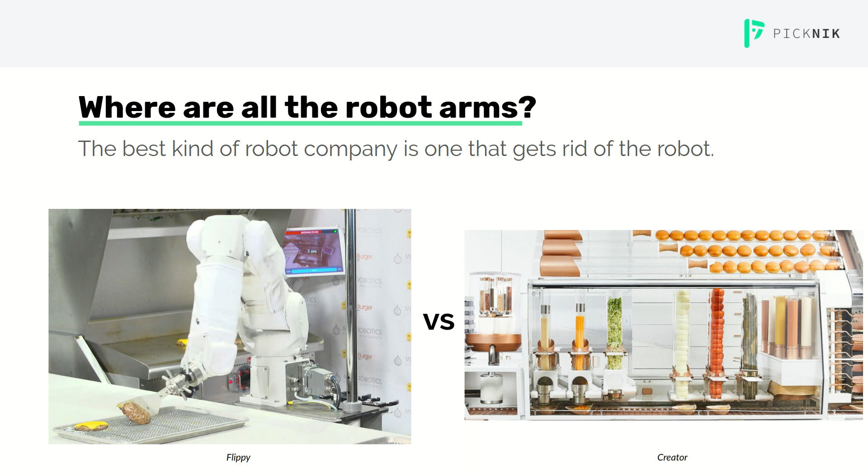Similarly, in San Francisco Airport, you may have seen Cafe X. They have a robot barista to make you coffee, but we've had coffee vending machines for decades. While the quality may not be as high, I bet we could fix that if we put our minds to it.

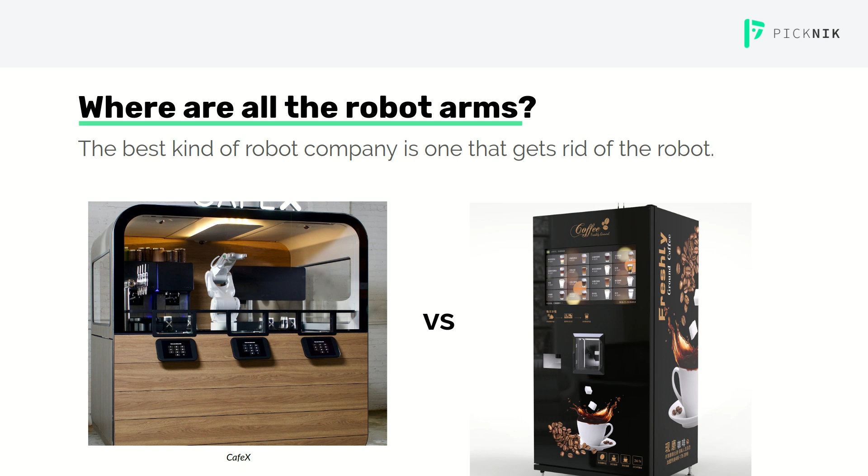So perhaps robot arms aren't always needed, and that's why we haven't seen them all the time in our lives. But I would still expect that in our normal day-to-day lives, we would come across, in this day and age, in 2020, robot arms more often. Unless you work in a factory or a car manufacturing plant, you may never see robot arms on a day-to-day basis.

But the dream's always been there, and it still is. I think we're on the threshold of something big, seeing robot arms really explode in investment and commercial activity beyond manufacturing. The dream is this multi-purpose robot, and that's when I think robot arms are appropriate: when you have a multitude of tasks that the robot can adapt to and do alongside humans, not having to change the environment much, not having to change your kitchen, your home, your office.

In this picture, we see the famous PR2 robot, built by Willow Garage. It was the original robot built for ROS, which I'll talk about later, the robotic operating system. This is essentially the promise of Rosie the robot from the Jetsons, in 1962 when that cartoon first aired. We've been dreaming of this for a long time.

What you see in these pictures of dishes, cooking and laundry, this isn't commercially available yet, or it barely is. This is mostly pictures from research groups and labs. So let's not get too excited, but I think we're on the cusp of that.

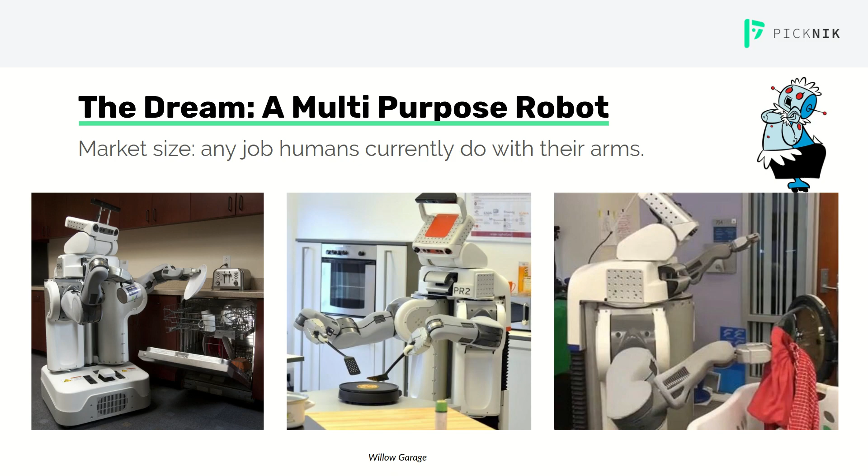Before I talk about the future, just a quick background of where we've been. In 1961, we saw the first industrial arms being used in manufacturing plants. That's a full 60 years ago now, and teach pendants were the dominant way of programming them. There's been incremental progress ever since, such as PC-based control.

The biggest thing in robotic arms in recent years, all the buzz, is cobots. Marketers love the term cobots. What that means, in case you're not an expert in this area, is the robot's safe enough to work alongside humans. You could have a human doing a task and the robot assisting, or the human take over, or the robot take over, and the forces, torques and other aspects of the robot behavior are such that it's safe for an average worker to work alongside.

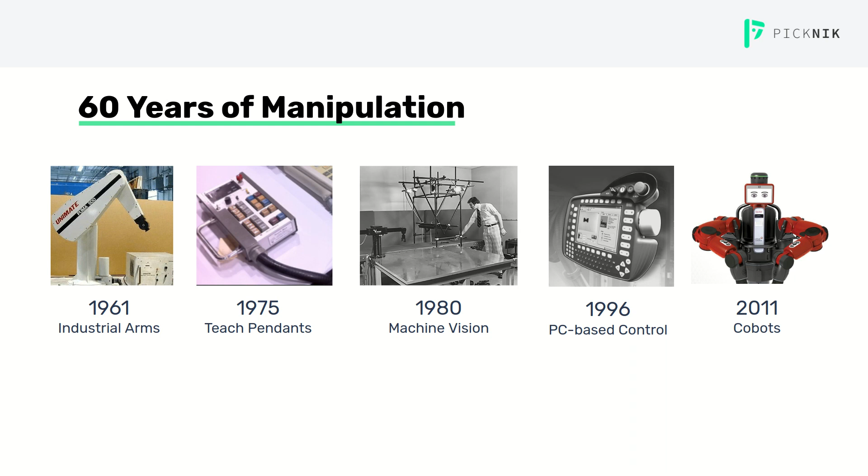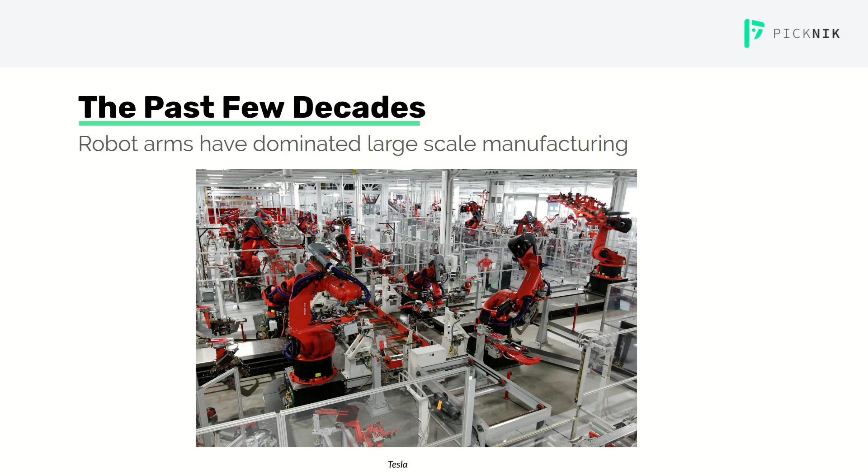But there's still been a lot promised with cobots that hasn't fully come to fruition. The other thing about cobots is that they don't require a safety cage and e-stop, the same kind of e-stop circuits and such. So where robot arms have really dominated is large-scale manufacturing. This is a Tesla plant, but really every car manufacturer, that's still the number one place where robot arms are sold, and all sorts of other manufacturing.

More recently, what's really exciting right now in terms of robotic investment for robotic arms: self-driving cars were huge a few years ago, and other sorts of AI, but right now the warehouse logistics space is blowing up. I think a lot of this is because of Amazon and how they're dominating this industry of next day shipping, 2-day shipping, and other companies are trying to catch up, such as Berkshire Grey, Right Hand Robotics, Kindred.

They're all doing types of mixed package, mixed parcel sorting, where you have to sort between different products and fulfill them for different orders. It's a lot harder problem than a conveyor belt of the same exact product; rather, you have this large mixture, and it takes a lot more AI, perception and sensing to achieve these.

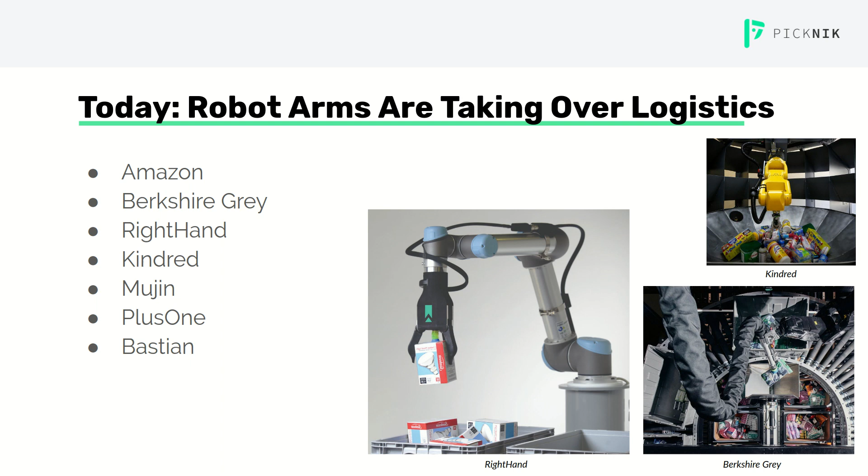What we're on the cusp of, I said tomorrow in this slide, maybe it's tonight. Mobile manipulation is the next big thing, combining autonomous vehicles with robot arms. A number of companies are going after this right now.

IAM is one of the more traditional ones, the robot arm tacked to a base. Invia doesn't really have a robot arm, so it barely belongs in this talk, but I think it's pretty clever how they use a combination of suction, a mechanical system, and a scissor lift to move boxes off shelves.

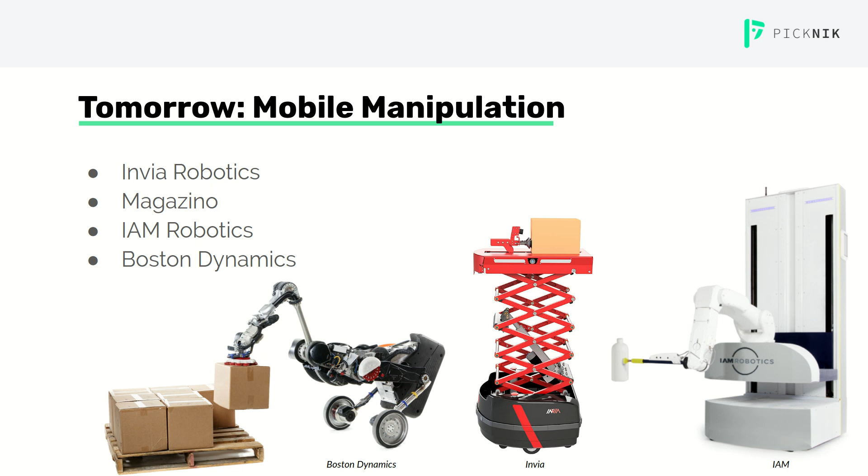And finally, the gorilla in the room, of course, is Boston Dynamics, popularized by all their great demo videos. Here, they've now turned their eye towards a commercial application of warehouse logistics. Other companies are also coming to the front, like Bastian. And so the market size for all of this is huge.

Basically, the tasks that humans do with the two appendages on their body—we do so much with our hands and our arms. As robot arms become more capable, they will be able to do essentially all of those things. So because this is robo business, I wanted to provide some concrete numbers: this global robotic arm market is forecasted to basically double by 2024, to 40 billion.

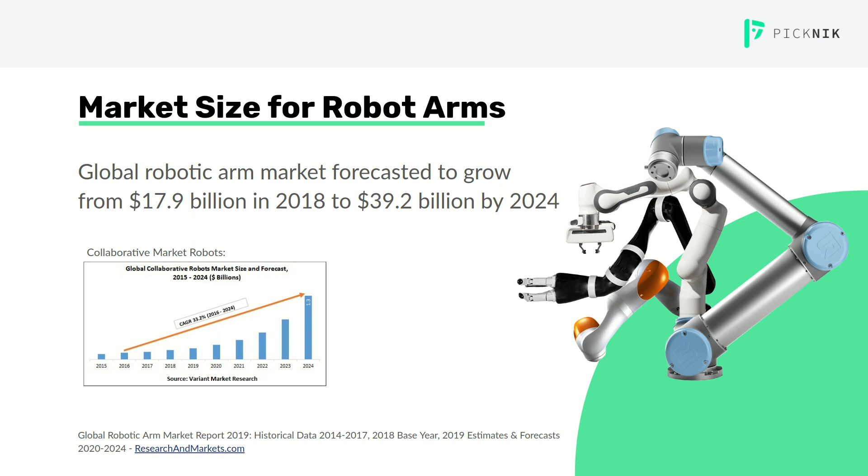And even the collaborative robotic space is exploding, as shown in this graph. So there's just a lot of money and attention being paid right now to this. But the question is, how do we still get these robot arms out of the factory? There's some limited success right now, but it still really hasn't taken off.

Particularly, where is our Rosie the robot? So I personally—my career has been about robotics and arms—and my dream has always been to have a robot that can do things like laundry and setting the table.

And so how can we get robots beyond these highly structured factory environments, even warehouse environments, into other commercial spaces, medical spaces, and consumer spaces like the home?

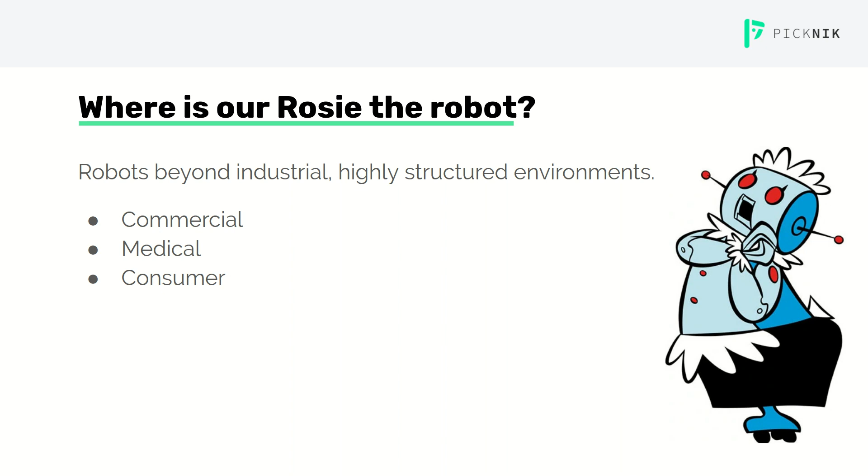So there's a few things, and what I call them here are these next-gen robot manipulation capabilities, these advanced capabilities. Even Boston Dynamics has done some pretty advanced stuff, but when you look beyond the demo videos, there's still a lot of shortcuts they're taking and a lot of blind spots in their capabilities. So I want to present to you in this talk these five things that are preventing us: costs, the software capabilities themselves, things around safety, mobility, and standards.

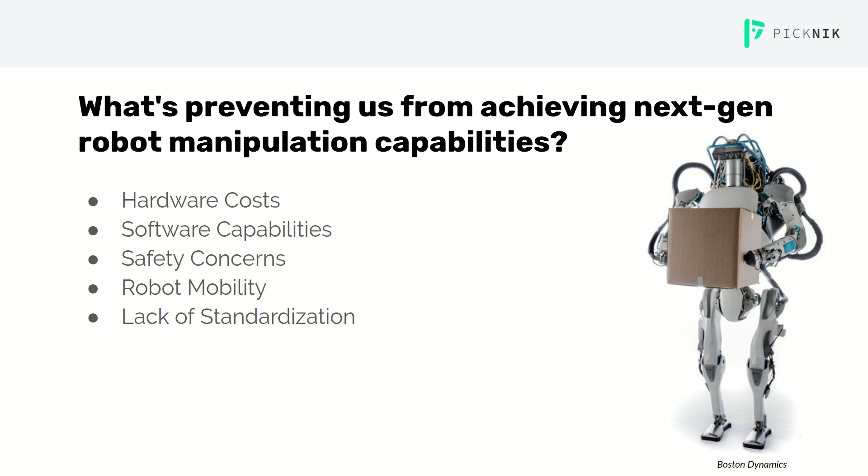So in terms of hardware costs, the harmonic drive pictured here is the bread and butter of most robotic arms today, or at least for collaborative robot arms. There are many other mechanical systems for controlling robot arms, hydraulics and whatnot, but let's just start with this example. This piece of equipment has a lot of tight tolerances that are expensive to manufacture. And so in order to get the precision and accuracy that manufacturing applications demand, this is a requirement.

But if we could make smarter software that can compensate for things like mechanical noise and backlash in robot arms, then we could presumably make cheaper hardware. And so things that would accomplish that are closed loop control, where you take sensors and get quicker feedback, and other things like visual servoing.

So an example of this: if you're listening right now and you have something in front of you that's a fixed object, reach your hand out full and straight. Don't touch anything, but put your finger very close to an object—maybe it's your laptop, maybe it's the dashboard of a car you're driving right now. Well, if you're driving, be careful. But notice how if you put your finger very close to an object and focus on it, your finger is kind of shaking and can't exactly hold its position.

Now, an industrial robot arm—these traditional beefy arms—can be super precise, where you don't really notice any shake or jitter. But our human arms, we don't have very precise manipulators. Our arms are noisy, and that's okay—we're extremely versatile. Humans are very dexterous and can do a lot of great stuff. So presumably our robots should be able to do the same thing for these everyday robots in non-manufacturing spaces. So we know it's possible, we just need smarter software.

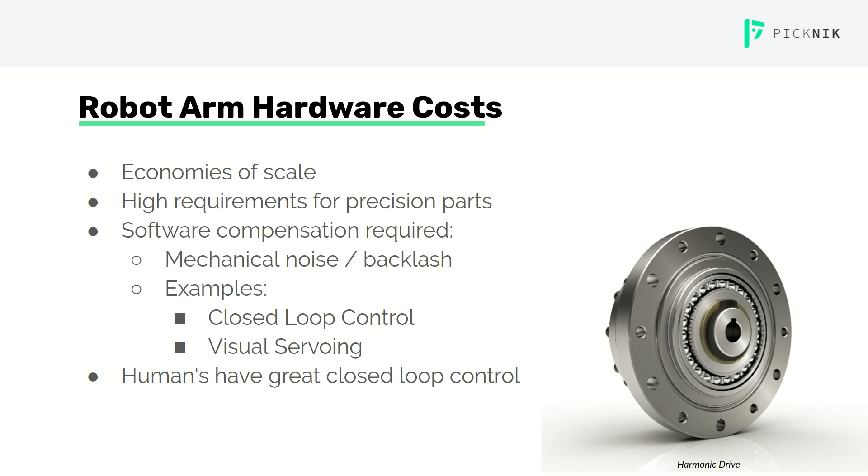There aren't a lot of killer apps right now where robots have really blown up, or any particular robotic company that's really blown up outside of these factories and warehouses. When it does, though, we'll see prices plummet. So if we could attach a robot arm to every cell phone that's manufactured today, we would see prices drop.

That's totally impractical and makes no sense, but you get the example. So the next point of what's holding us back are these software capabilities. I just talked about how we need closed loop control, but there's other things that are difficult for robots to do outside of structured environments.

So things like partial occlusions. In this picture here, you see it's a very cluttered environment, and maybe you want to grab the salt shaker, but it's covered by another cup or pot. The robot has to reason about how to grab something behind something else, and that takes a lot of extra computation to plan this non-linear motion.

On the perception side, when something's partially covered, it's a lot harder to recognize than if you have the full visual of the object. If you can only see the top part of a salt shaker, it might be more confusing for a computer system to recognize.

And then finally, these unpredictable situations. It just takes a lot more state machines and decision matrices to predict these different situations and how to compensate for them. A lot more error states to account for.

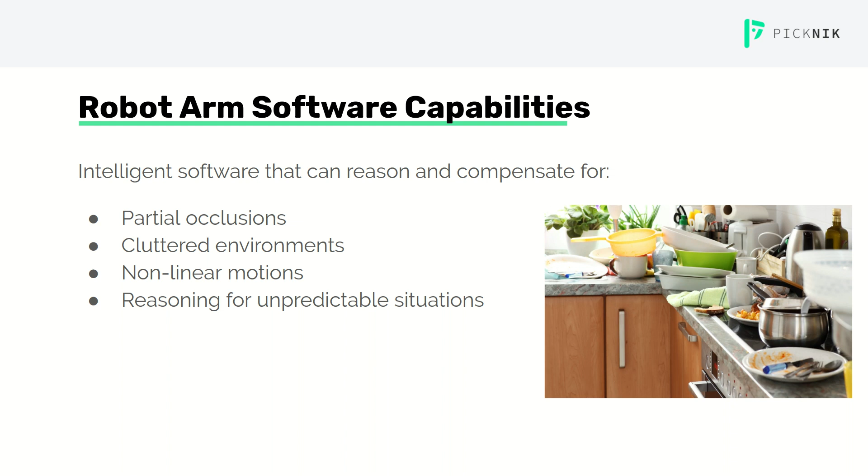In self-driving cars, we've had the technology to do self-driving for a long time, but getting all those unpredictable situations of bikers and pedestrians jumping out in front of cars all the time, that's taken a lot of engineering and ingenuity to accomplish, and we're still seeing that worked on today. We'll see the same thing as robot arms are released into more common spaces.

And that brings me on to safety. Speaking of jumping out in front of cars, don't do that.

These consumer applications, like these hypothetical robots in your home, face a whole new slew of difficulties that we haven't seen in factories. You have non-professionals who aren't trained, who maybe aren't as alert because they feel safer in their normal offices or environments. So, for example, we haven't dealt with, as researchers or developers of robotics applications, children playing on a robot.

But a robot arm has all sorts of pinch points that could potentially hurt a child, and that would be terrible and a giant liability issue. So we have to worry about that, or even other unpredictable things like curious pets. I've never seen a video where a cat jumped on a robot and gave it a hard time reasoning about what to do, but it's bound to happen one day.

And then finally, there are trade-offs. So cobots, one of the things they've done to make them human safe is to simply slow down the velocity, the momentum these pieces of mass have, so they can't harm a human. But if you have a robot that's too slow for safety reasons, it really doesn't become very useful.

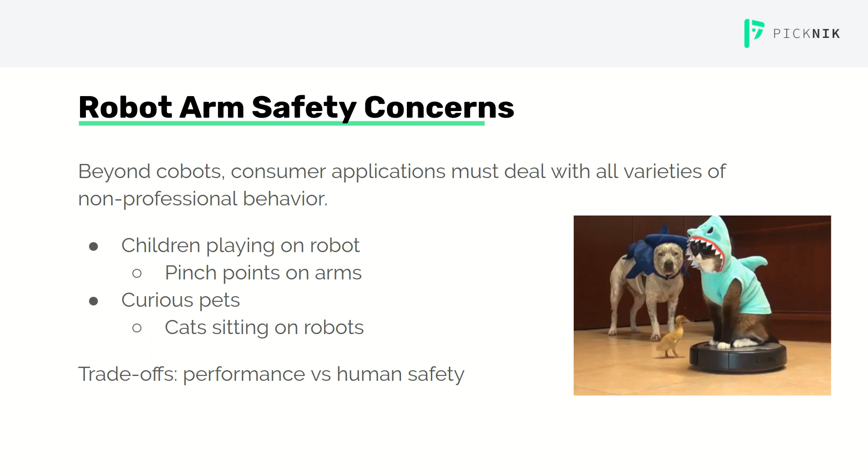If you ask your robot to set the table, but it takes 10 minutes, your food's going to be cold and you won't be happy with this robot. You won't buy it. So it's a trade-off, and we need more clever ways of reasoning about the environment for safety concerns.

One thing robot arms are typically limited by is that they're bolted to the floor or to a table, so their workspace is only what their 6 or 7 degrees of freedom can reach. We have to worry about how to give a robot a larger workspace so we can do more tasks, because if you're bolted to a table, there's only so much you can reach, and you can't go across the room to do something else useful.

So of course we need mobile manipulators that have wheels or legs. But then a whole other set of problems occurs. First, costs go up because you have a lot more hardware to deal with. The complexity goes up because calibrating your robot arm's location in space is made more complex since it moves.

Another thing is that in a lot of homes and even commercial places, you'll see tough thresholds for wheels to drive over, or steps, or even worse, staircases. A lot of commercial buildings do have elevators, but not all. So if you don't have an elevator, it makes things very difficult.

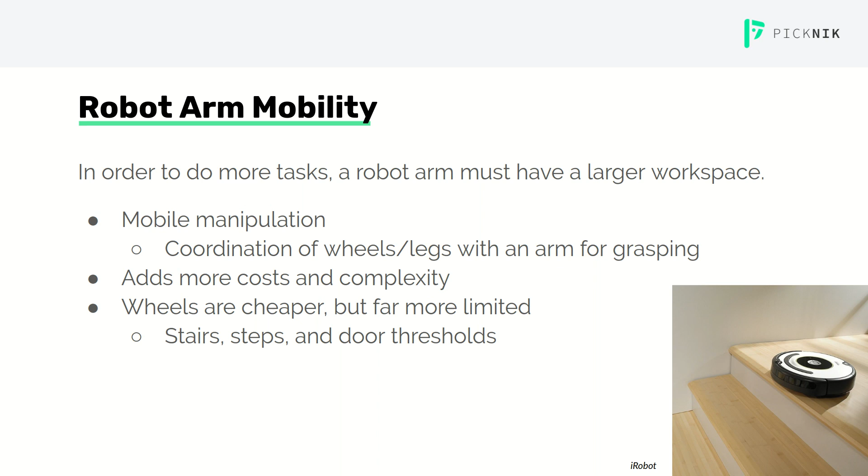The common workaround for this is legs, but legs are even more expensive in terms of hardware cost and in terms of the danger of losing balance and falling over—the same kind of problems we've seen with the Roomba and iRobot as pictured here.

Finally, the last point is standardization. This is really a big push of the rest of my talk: how do we standardize all these components that must be put together to make versatile Rosie-type robots to get these next generation manipulation capabilities.

Right now, every manufacturer of arms has their own custom interface, for lots of historical reasons. I did some research for this talk, and I was shocked about just how many scripting languages there are, for FANUC, ABB, KUKA, Kawasaki, the list goes on. Then on top of that you have standards like Python, C++, Lisp. So it's difficult, if not impossible, for one person to know how to use all these different types.

And what that creates is vendor lock-in. Once you build a system for one type of arm, it becomes hard to transfer that application to a different arm. And that reduces price competition.

Now I want to talk about why current solutions do not address this Rosie problem. There's two areas I want to focus on: one is off-the-shelf hardware, and the other is on the software side.

On the hardware side, most hardware is shipped with programming environments that are too restrictive for a lot more advanced applications. Now there's benefit to this because they're very focused, they're really good at doing a few things, and perhaps easy to do those few things, which makes it better for non-experts. But if you're an expert user developing your own robot product...

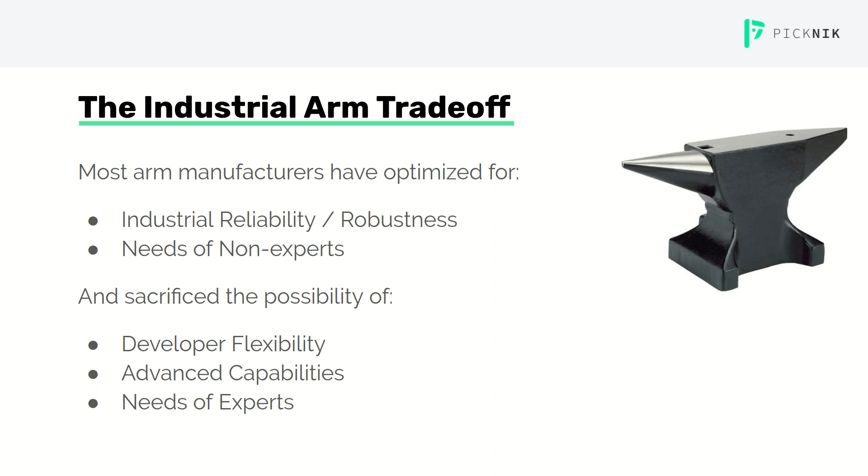I've heard this resonate from a lot of our clients at PickNik and a lot of researchers I've talked to, and other people I've shared these thoughts with. So in sum, I'd argue this is an innovation-hindering environment. There are a lot of great things going on in robotic arm manipulation, but there are some issues if you're trying to build non-industrial robotic arm applications.

So you have to balance three things, and it's a very tricky thing to balance. If you want to make a robot to make burritos, for example, you'll have to make custom software that solves fundamental, low-level algorithms for robots - like inverse kinematics - things out of textbooks that have been done a million times before. You'll also have to build custom software for all the reasons I just described.

You may come to the decision that you can make it cheaper and avoid all these API issues, so you have to set up your own supply chain and do all the robustness testing required in making hardware. Very big endeavor.

And all the while doing these two things, you have to also focus on what your actual end user needs and wants. So if you're making burritos, what's the temperature going to be? How do they want it delivered? What's the best flavor profile? These things don't even matter about the robot algorithms - you just want to take those and focus on the secret sauce of whatever company, Robot for X, that you're focusing on.

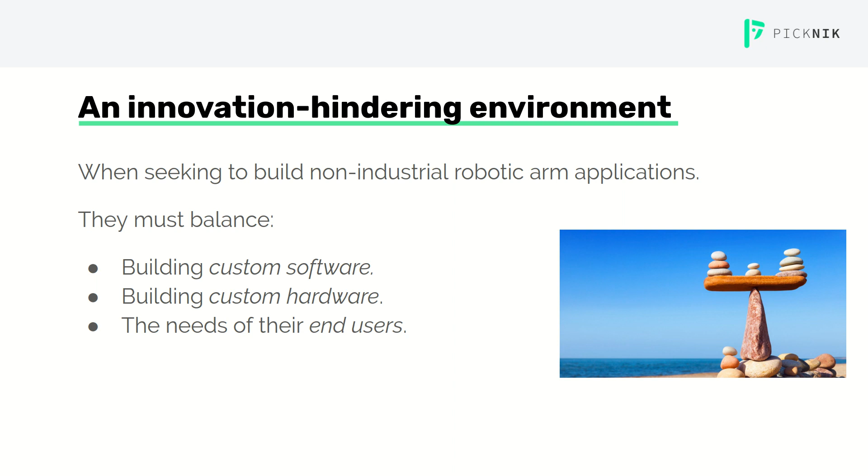So, the ARC - an alternative approach. I was going to get here eventually, but I think a lot of the solutions to the problems I've outlined are open source robotics. This is a much more collaborative environment that will cause more innovation so we can finally get to that Rosie the robot that we all dream of, or most of us dream of.

This innovation-limiting environment would be solved better if we had more open standards in robotics. Robotics is a young field, so it's understandable we haven't established a lot of great standards yet. But open source is a great way to make huge strides there, and we already have - open source has been around for quite a while now in robotics.

It would help with interoperability so you can avoid vendor lock-in, better collaboration between academics, researchers, commercial companies, R&D labs and corporations, and really just avoid reinventing the wheel. On the collaboration point, there are a lot of hard problems not solved yet in robotics - we can't just assume we can take what exists and close our eyes to innovation, but there are still fundamental problems preventing us from solving this Rosie problem.

So the logo down here, ROS, the Robotic Operating System - I'm sure almost all of you have heard of this, but maybe only a little bit, so I'm going to give some background. This was started in 2008 at Stanford and at Willow Garage and has really taken the robotics industry by storm. It's got a lot of momentum. Willow Garage's thesis about why ROS matters is that creating truly robust general purpose robot software is hard - so hard that no single individual, laboratory, institution, or even company can hope to do it on their own. So we have to work together to get this future of manipulation that we're dreaming of.

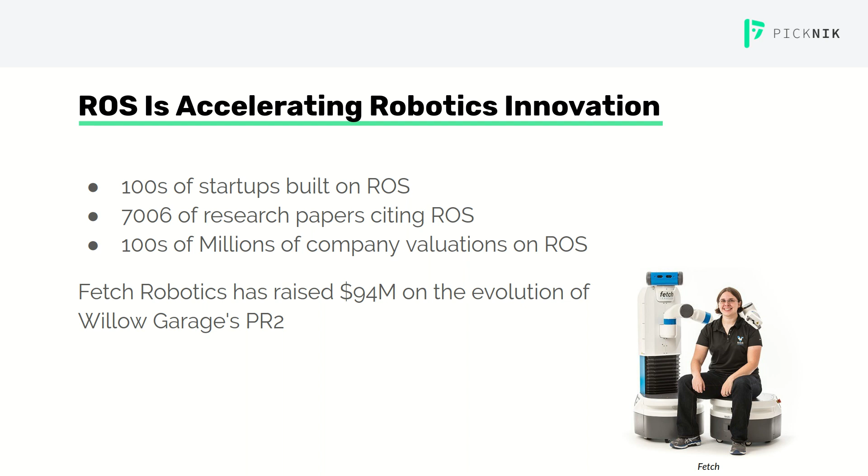I mentioned earlier just a little bit more about ROS. Hundreds of startups have used it. There's been 7,006 research papers cited to date on ROS, and hundreds of millions of dollars of company valuation, such as Fetch Robotics. The CEO, Melonee Wise, was one of the original creators of ROS before she started Fetch. This company has since raised $94 million based on that PR2 robot I showed you at the beginning of my presentation. They've basically evolved that to what you see in this picture.

To be fair, open source is maybe not always appropriate. If you have low customization requirements, if you're not building a robot product yourself, just automating a factory that makes paperclip widgets, maybe you don't need something as complex and flexible as ROS or open source robotics in general. If you don't care about owning any robotics IP and you'd rather just license it from another integrator or robotics company, maybe you don't bother with ROS, although I'd argue the companies you're licensing from are using ROS under the hood, most of them. And finally, if you don't have an expert development team, you don't want to pay those high San Francisco or PhD salaries, maybe ROS isn't for you—but there are developers all over the world using ROS that doesn't require those high salaries.

A common concern I hear when talking to our clients is intellectual property, and this myth that bringing in open source can somehow hurt your patents or your IP. As long as you're not doing copyleft—check with your lawyer, make sure you read the licenses, but ROS almost never has that—then you're pretty much in the clear. Really, your competitive advantage shouldn't be these building blocks that can be found readily in robotics textbooks. You don't want to rebuild the same things over and over; it's just a waste of time and money. Your innovation should be taking these components and composing them for a particular application, like the burritos I mentioned, not reinventing the wheel.

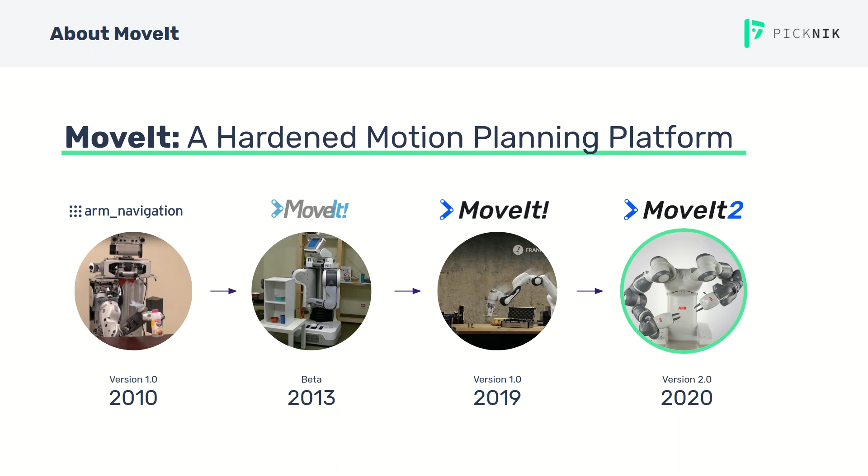The first version was actually called Arm Navigation, and it started about the same time ROS started, in 2010. There was a full rewrite to make it a lot more powerful and flexible, and that was rebranded to MoveIt in 2013. We didn't officially take it out of beta—pre-1.0—until last year, just as a courtesy. We were like, yeah, it's really stable, we should send the message that it's super ready to be built on. So we gave it the 1.0 label, a very common thing in open source robotics or open source software. I'm particularly excited about MoveIt 2.0, which we've kicked off this year. I'll get to that slide in a minute, but it was first released last February, we had another release this February, and another one coming up soon.

So what is MoveIt? It's a set of different capabilities that you can mix and match to make your own custom applications. It's very modular, plugin based, and it's advanced motion planning, meaning it doesn't just interpolate straight between A to B, but it can actually plan around things.

An example of this: if you have a robot opening a refrigerator door, you have to grab the handle, pull it open, and then when you release the handle you can't just move into the fridge—there's a door in the way. You have to have an algorithm and some kind of software reasoning to tell you to move your arm out of the way of the door and then back into the fridge to grab whatever ingredient. That requires things like collision checking, where you have a virtual model of the environment, and the robot reasons about how to not hit things. You combine that with 3D perception so you can create that model using depth cameras, RGB cameras.

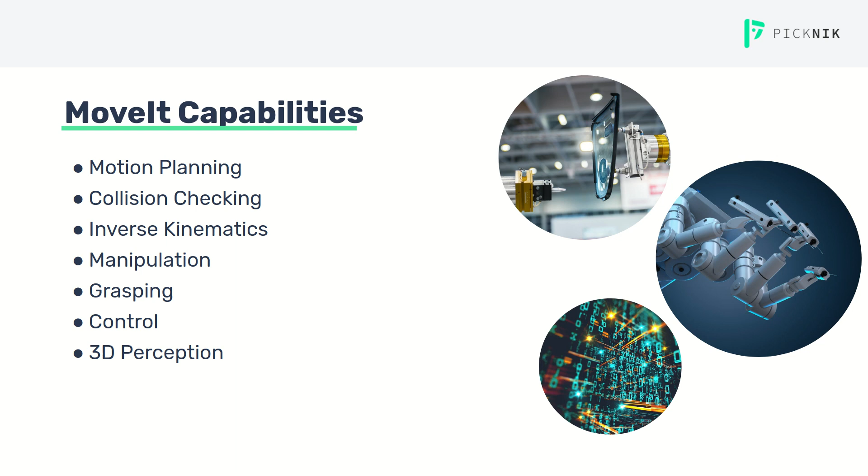Other things that MoveIt provides are manipulation and grasping. How do you grab the handle? Where do you grab it? What angle do you grab it at? And finally, control - that's the low-level drivers that command your actuators, like PID loops.

It's a whole ecosystem of components in MoveIt. A lot of different research groups have contributed their work to it, so you can mix and match the components that make sense for your application, which makes it very extensible. You can even make your own custom ones if there's a particular piece that doesn't suit your needs.

MoveIt 2 is based on ROS 2. Just a quick recap on ROS 2: the community is very excited about this right now because unlike ROS 1, which was originally designed for academia but has been used in lots of industrial purposes, ROS 2 is designed for industry from the get-go. It's designed for commercial applications, meaning you can prototype with ROS 2 and then when you go to market you don't have to rip it out and replace it with something else. It's production ready. A big request from users was not just to support Linux, which is what ROS 1 did, but to really have first-class support for Windows and Mac OS, and that's available now.

What I'm going to talk about next is real-time capabilities. Real-time is a big deal for MoveIt and something that wasn't available in ROS 1. So why care about real-time motion planning? Well, to get these advanced motion planning things I've been hinting at throughout this talk, you need really responsive and fast software.

You need guarantees about when you send a message to a different process, how soon it's going to get there. This allows more complex interactions using forces and torques - that data expires really quickly. When you have dynamics being planned for, you've got to be very fast in your reactions. You can do things like dragging, pushing, smoothing, wiping, scraping. Traditional applications have mostly focused on pick and place, but this is much more complex. It'll also enable closed loop control, reactive control, and very high rates of streaming commands, up to 1,000 hertz or many thousands of hertz.